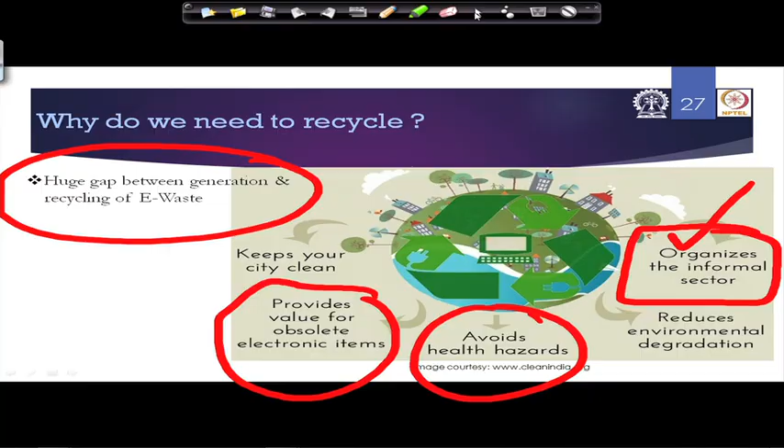In Mumbai, one of the oldest e-waste recyclers in India, EcoReco, is based there. Mr. Jain heads that company, and I had seen him at some waste-related meetings. He advocates that we need to bring in the informal sector, which is very good at collection of e-waste. The informal sector can do the dismantling part, but then it has to come to the formal sector for the rest.

But of course, how will the economics work? The money that can be made is actually from the gold and other precious materials that are recovered. So somebody has to figure out how the economics will work. Maybe the government has to create a small body which can bring all these stakeholders together and mediate between them to come up with a solution so it can work in that area.

So that's management of e-waste, in terms of recycling. What is the typical way this is done in a developing or developed country?

The e-waste comes in and gets sorted. If there's electronic waste which can potentially be repaired and used, or upgraded, you test it out, and if it can be refurbished, those things can go back into the market.

Places like OLX, eBay, and many sites these days let you buy refurbished computers. Even on Amazon and Flipkart, you often see products marked as not brand new but refurbished, and there is a market for that. As long as it's from a trusted supplier, people will buy it. So this is one pathway: repair, upgrade, test, and refurbish.

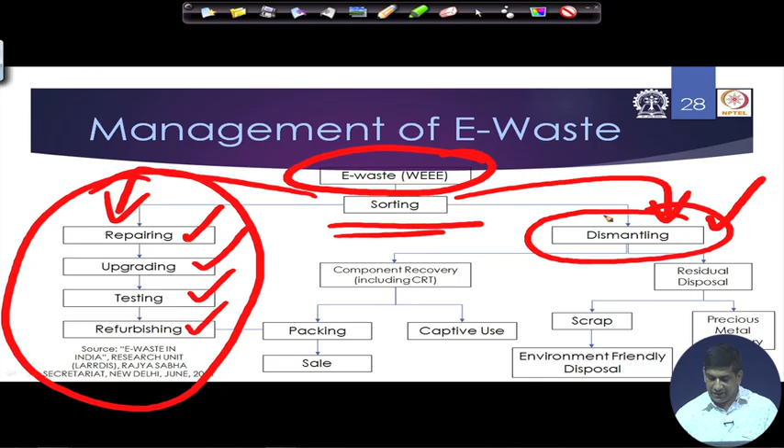The problem arises when we get into residual disposal and precious metal recovery, where heavy aqua regia and other processes are used by the informal sector in a very crude way. The leftover scrap just gets dumped on the side of the road, sometimes in low-lying areas, close to a river, or close to a pond.

There are instances where the pH of a water body near such sites is almost zero, and lead concentration is several hundred times more than what should be in a surface water body. So that becomes problematic.

Then there's the CRT, which used to be a big component. Gradually CRTs are going down; we aren't using that much CRT anymore. Everything is becoming flat panel, and even computer monitors and TVs with CRTs are phasing out.

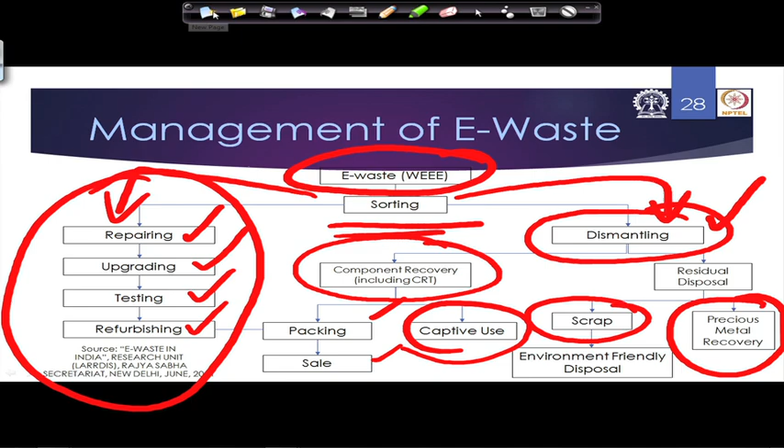But in the disposal stream, you still see some CRTs showing up. If the CRT is in working condition, it can be packed for captive use or sold. If not, the glass can be recycled and lead recovered from it. So in the big picture, this is how e-waste management typically works when we try to keep it out of the landfill, which is the goal here.

Let's look at some of these top e-waste management companies in India. First we have E-Parisaraa, which claims to be India's first e-waste recycler. It's a pretty big company based out of Bangalore, and now they have branches in other places as well. They try to recycle in an eco-friendly way, collecting e-waste and recycling it responsibly.

Then you have EarthSense, another company based out of Andhra Pradesh, or Telangana now. It has services in the area of Delhi, Gurgaon, Mumbai, Kolkata, Hyderabad, Chennai, Bangalore, Kerala, and other places. That's where they are doing their work.

In terms of steps, they collect the garbage, transport it, segregate, dismantle, and recycle. In terms of recycling efficiency, almost 98% of the material can be recovered from e-waste.

If you just look at any electronics, say an old computer at home, take it apart. If you are an engineer, we should be good at that, isn't it? We should try to take things apart and learn what's in there. If you take it apart, what you'll see, if it's an older computer, the casing will most likely be iron.

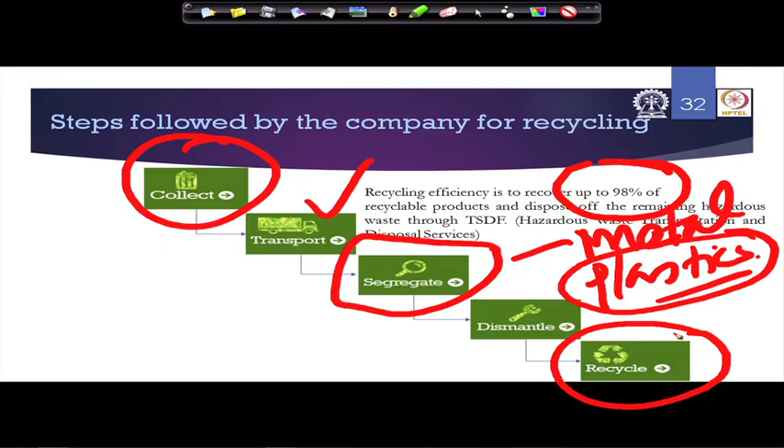Up to this point, the informal sector can still do this work for us. The problem right now is, although we have e-waste management rules, our authorized recycling companies are not working at their full capacity - they are not getting the e-waste coming to them. So if we can take the informal sector, which is doing this job anyway for most of the electronic waste, and connect them with our authorized recycling companies that have good technology, it's a win-win for both.

But somebody has to make it happen, and I think it's only a government organization, some sort of semi-government or quasi-government organization, that has to set this up to facilitate it. That's how they do it in other countries. Like in Ontario, there's an e-waste stewardship program - it's a very small, government-funded organization.

What the government does is get money from all the electronic producers who sell their products in Ontario. As I was telling you in the previous video, you have to pay $35 extra for a laptop that you buy.

35 is just approximately, depending on the type and cost of the laptop, and part of that money goes to the EWaste stewardship program that funds that program.

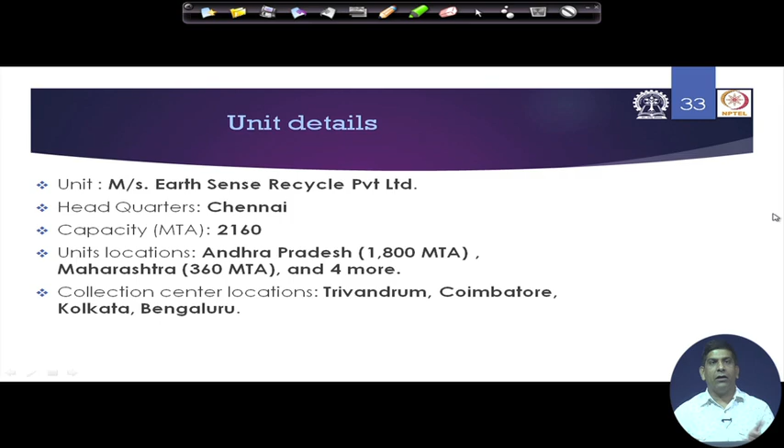So this is some detail of Earthsense Recycle, headquartered in Chennai, with unit locations in Andhra Pradesh and Maharashtra, and they have 4 more units. For collection centers, they have Trivandrum, Coimbatore, Kolkata and Bangalore. That's where they have their facility.

Then Sims Recycling, which is trying to do work in Karnataka, Tamil Nadu, and Uttar Pradesh. Again, that company is out there trying to do some work in this area. Attero is another recycler, based in Delhi and Hyderabad. They are also doing work in this area. Very similar concept—everybody is using a similar concept.

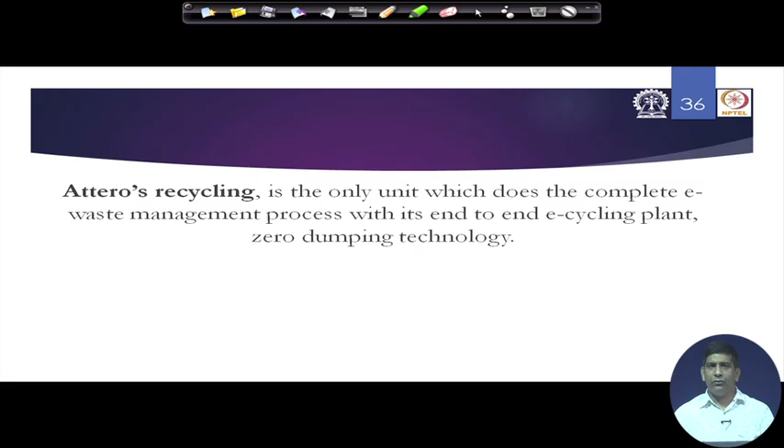Here it's the only unit which does a complete e-waste management process with end-to-end e-cycling plant, zero dumping technology. Many of the other plants only handle basic stuff, not the highly complicated stuff. For example, batteries and heavy metal recovery from batteries actually gets sent all the way to Belgium.

Because the technology is not out there, it's mostly done in Belgium, by a company called Umicore, I think, that does that in Belgium. But that's for what is collected in the formal sector. Whatever is collected in the informal sector just gets somehow recycled. That's actually not real recycling—they just try to recover some heavy metals to make money, and the process damages the environment.

So Attero, the way they work, they will come to your house and collect the e-waste, all electronics, from your doorstep. It's a NASA recognized technology inventor, with a wide range of services and countrywide pickup, and then they take it to a center for processing, where they recycle it and reuse it.

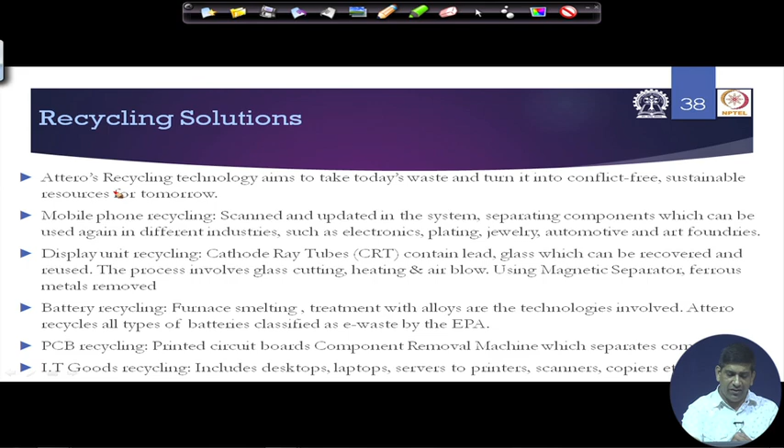Their recycling technology aims to take today's waste and turn it into a conflict-free, sustainable resource for tomorrow. They do mobile phone recycling, display unit recycling, battery recycling, PCB recycling, IT goods recycling, and all those things.

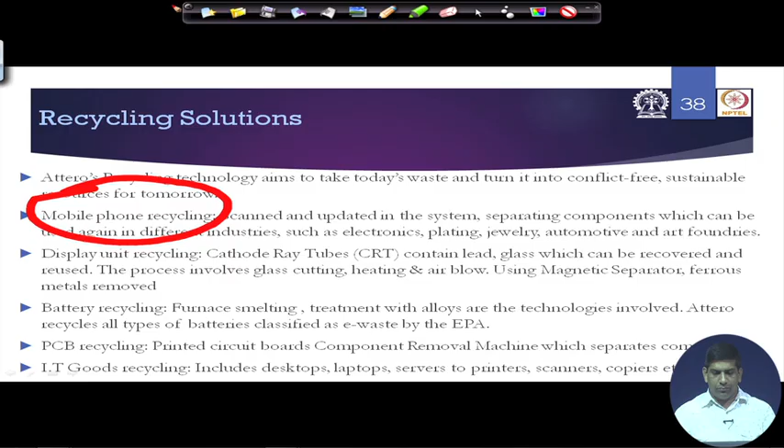So in terms of unit details, Attero recycling capacity is 12,000 metric tons. It's in Uttarakhand. Center locations are Delhi, Hyderabad, and other places.

The next is a commitment from Green Earth, that's this particular company. They are based out in Bangalore. E-Waste Recyclers India, EWRI, does the recycling of e-waste.

So as you can see, there are companies out there. It's not that companies are not out there in India. We Recycle, that's another one, again based out in Delhi. They try to do collection of e-waste.

Green Escape, again based out of Delhi, fulfills social responsibility through sustainable practice. JS Pigments serves mostly West Bengal, Odisha, Assam, Madhya Pradesh. That's their area, and they have an office in Kolkata as well.

Again, the action plan followed: collection of disposed zinc, brass, recovery starts with separation of containing metals. They try to use magnetics, sink-float, hand sorting, pre-treatment, melting, refining. JS Pigment is trying to do this as per environmental sustainability standards.

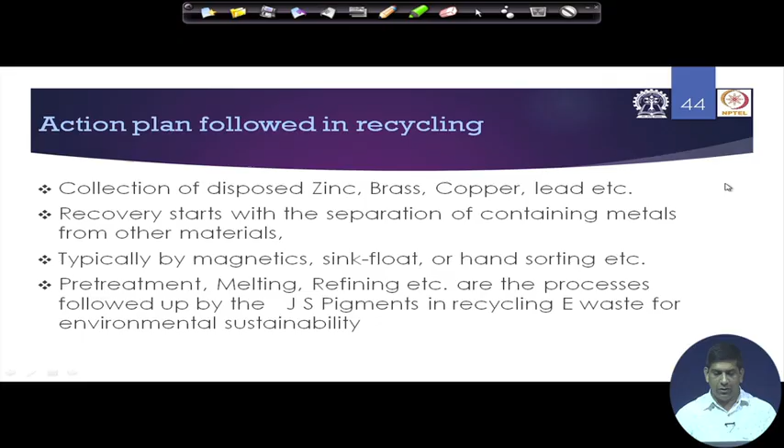This is just to give you some idea about the different companies out there. There are a lot of companies trying to do sustainable e-waste recycling in the country. It's not that things are not there, it's only that there is a gap between these companies not being able to get e-waste coming to them, and it mostly goes to the informal sector right now.

This headquarters is in Kolkata. Then High Tech Recycling India Private Limited, that's another one. They do e-waste recycling: removal of covers, removal of cable assembly, dismantling of rear panel.

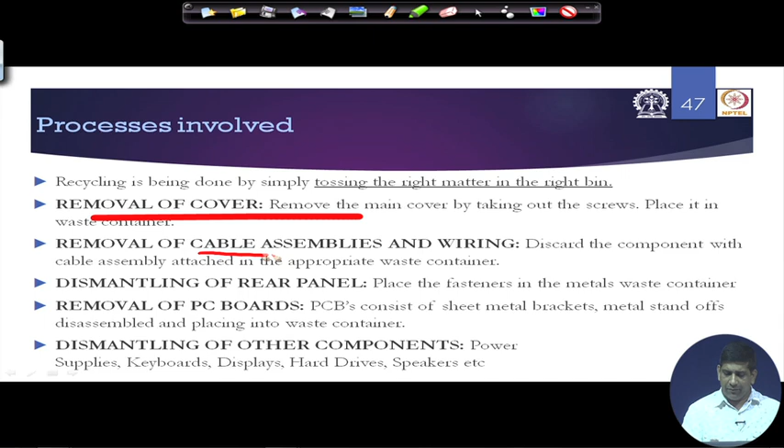So what I was trying to explain earlier: cable assembly and wiring, dismantling of rear panel, removal of PCBs, dismantling of other components. They try to do that and recover different metals, plastics and other things.

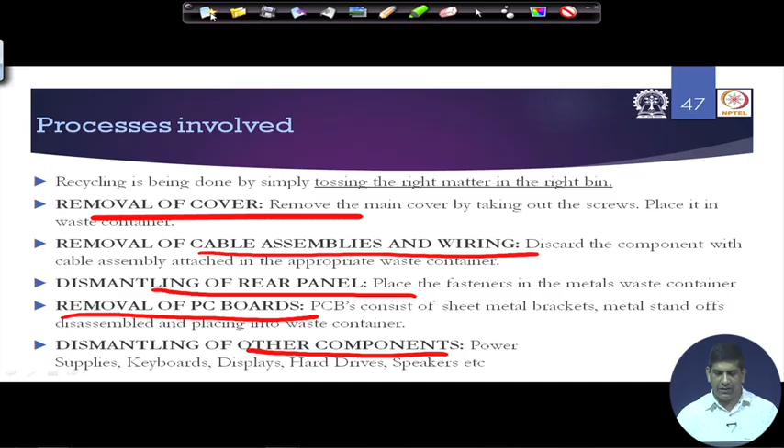They have a plant in Maharashtra, in Pune. If you remember, Maharashtra was the highest producer of e-waste in India. So you see a lot of plants based out in Maharashtra, of course, where the market is.

Then Earth E-Waste Management Private Limited, that's another company. Some of these companies' information I collected a few months back, almost a year back, so I hope all these companies are still working. If they are not, let me know.

I would like you to go search these companies' websites and find out if they are still working, because some of those companies were really struggling to survive as they were not able to get enough e-waste coming to them. So it's Earth E-Waste Management.

They again do sorting, identify usefulness. Every company has the same sort of process: sorting, identify the usefulness. If it's good, if it can be used, it can be refurbished and sold off. Then what are the hazardous components there?

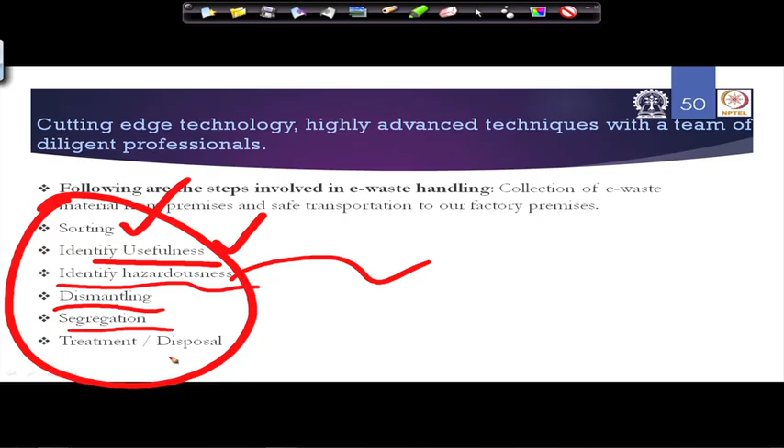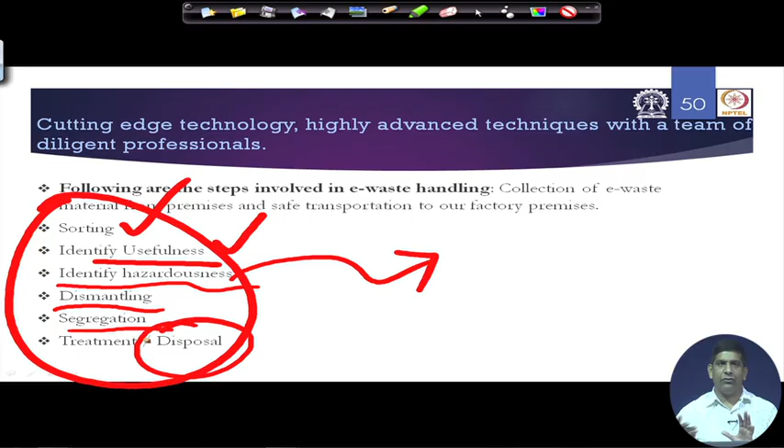You dismantle them, segregate them. Whatever is the hazardous stuff, you treat it. If you can treat it in your plant, if not, you send it to some other plant which can treat it. Whatever cannot be treated, you dispose of it in a safe manner, with safe disposal of electronic components.

That's how they try to do it. This one is based out in Gujarat, collection center in Surat, capacity 6,000 metric tons per annum. Most of the companies are pretty big. So this is how the different companies out there operate.

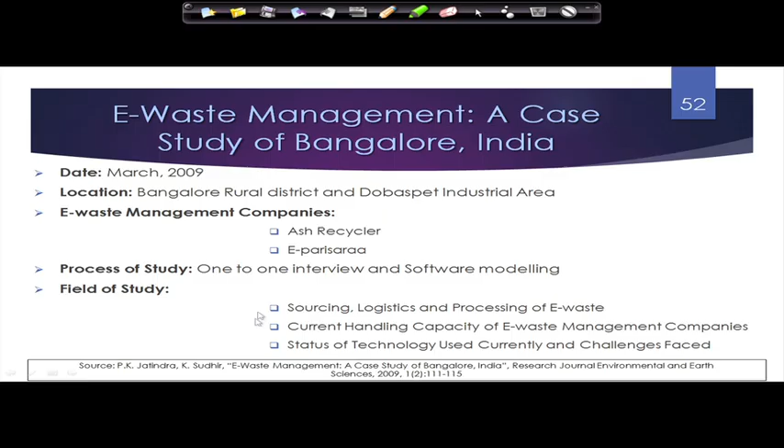We'll just talk about some of the stuff being done in Bangalore, which is the IT capital of India. There was one study done, basically a summary of this particular study, looking at e-waste management companies like E-parisaraa. They looked at one-to-one interviews, some software modeling, and examined sourcing, logistics, processing, current handling, and status of technology.

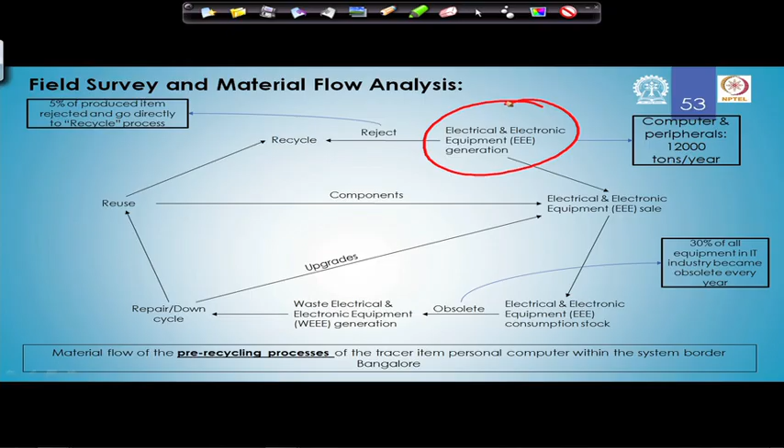That's getting into around 12,000 tons per year, and this number is a few years old, so it must have gone up. Out of these, they may be able to sell some stuff which is still working, and then that goes back to the consumption stock.

If it becomes obsolete, it becomes e-waste generation, then any reject has to get recycled.

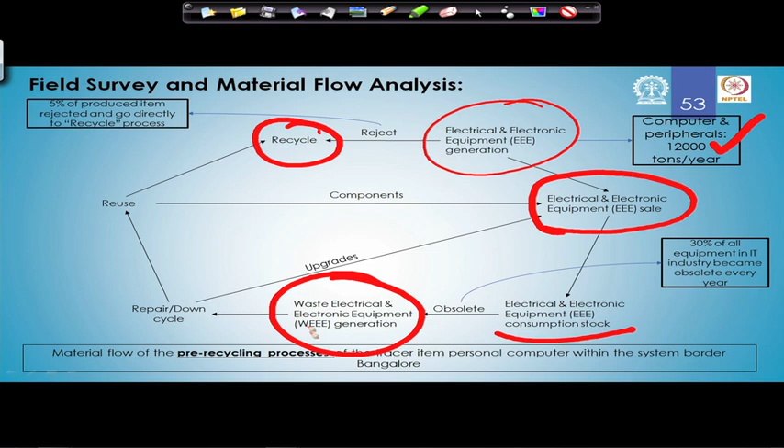When you have e-waste, you repair or downcycle. If you cannot repair, you have certain components - either the whole thing can be reused, or if not, part of the components can be reused, and that goes back over here. When you try to recycle the components, that again goes to the recycling companies.

This is what they have found, that 30% of all equipment in the IT industry becomes obsolete every year. So almost one third of the computers that we buy becomes obsolete every year. It's not that the computer you buy that year becomes obsolete, because it's a computer that was bought maybe a few years back.

These days computers don't have a big lifespan because software keeps changing, processors changing - i5, i7, different cores - and that leads to, because of the improvement, many times we are forced to buy new computers, new laptops. So that's

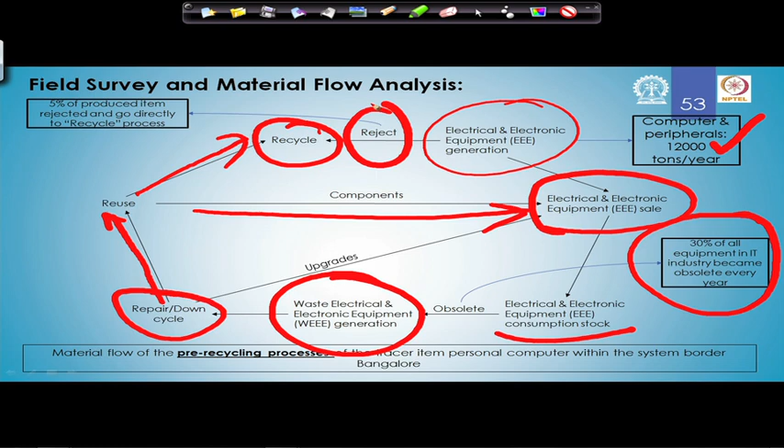goes into the waste stream. One thing is that in terms of the computer and peripherals, items also get rejected because of some bad items. So 5% of the produced item gets rejected and goes directly to the recycling process. That is also there in terms of the whole recycling picture, what they have seen in Bangalore.

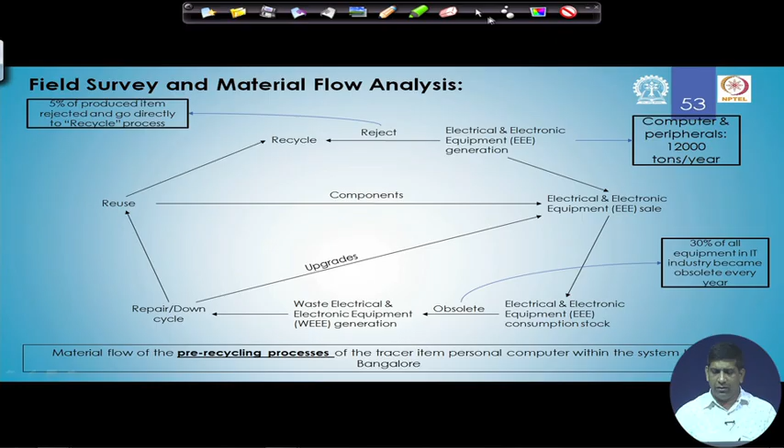Here's how they were trying to do recycling in e-Parisara, the recycling places: personal computer, dismantle, sorting, segregation. There are non-recoverable items, but there are some hazardous components. Those hazardous components need to go to an engineered landfill, a hazardous landfill.

If there is something incinerable, they can be incinerated. Non-hazardous, non-incinerable material can go to a sanitary landfill, which is the municipal solid waste. And recoverable metal, plastics and glass - this is actually a very good chunk. How do you recover that? You do size reduction, you shred it, you do some physicochemical separation, density-driven vibratory screen, triboelectric separation.

So all those different types of things can be done. Then plastic can be pelletized for new product where there could be mechanical recycling, pelletization, organic process, chemical recycling, thermal recycling - those things are there.

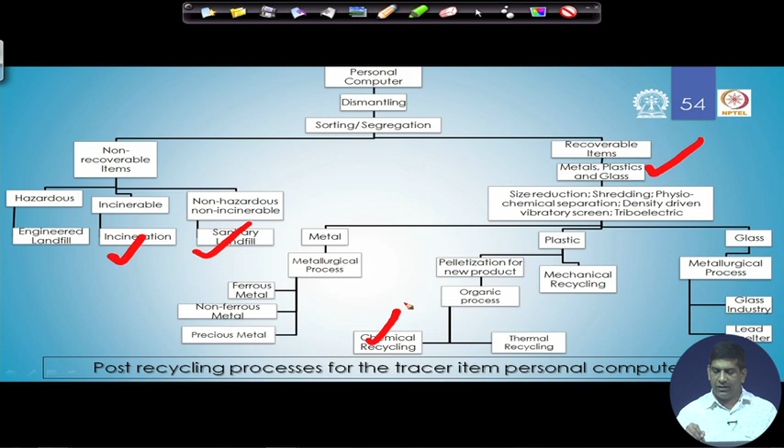For glass, there are metallurgical processes in terms of the glass industry - this glass also has a lot of lead, so lead smelters can be used. For metals, there are metallurgical processes which are used - ferrous metal, non-ferrous metal, precious metal. This is the most critical part actually, where those things are also used. So this is how the post-recycling processes work for different items in personal computers.

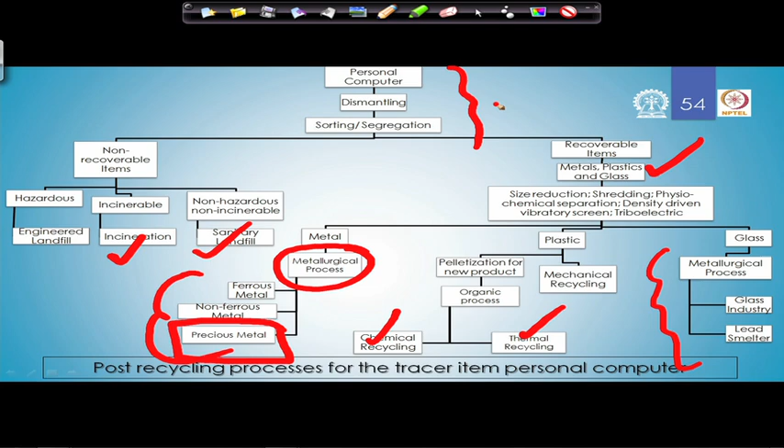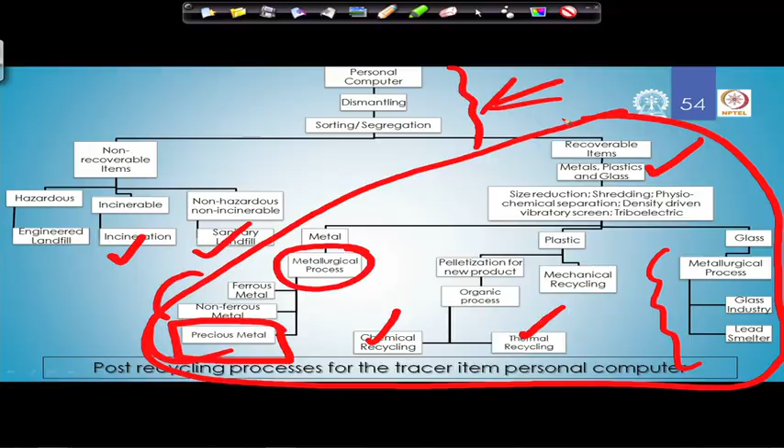Now, if you look at up to the dismantling part, things can be done at the informal sector level, but when it comes to this part, it is better to be done in a formal environment where you have some sort of environmental control - not only for environmental and human health implications of the population, but also for the workers working in these areas. That's one of the issues for the informal sector - those workers.

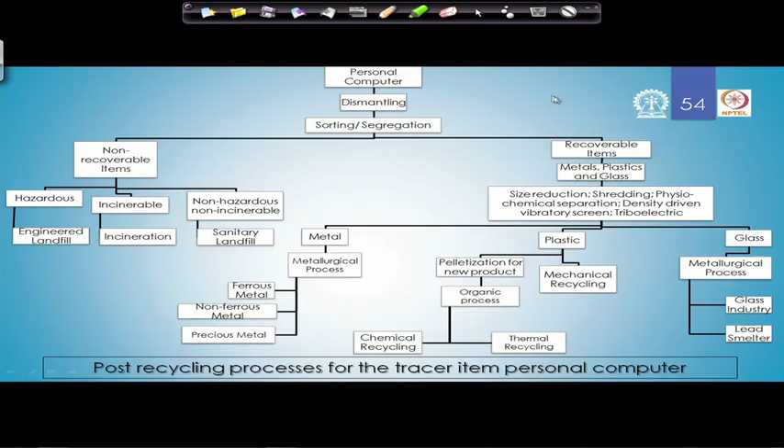Many of those workers actually don't survive past their 30s or maybe early 40s. Just because of all the fumes and other things that they inhale, they get all sorts of disease and they die very young, which is really sad. But that's what happens to those informal sector people who are working with electronic waste and any other hazardous kind of worker, any hazardous waste.

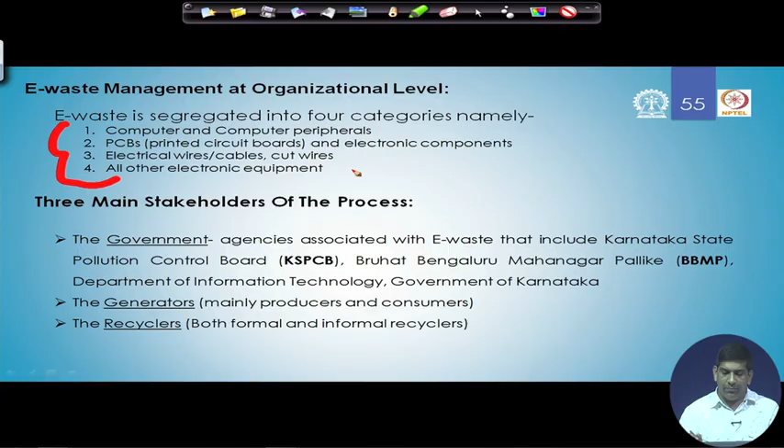So e-waste is separated into 4 major categories: computer and computer peripherals, PCBs which is the printed circuit boards and electronic components, electrical wires, and all other electronic equipment. The main stakeholders are, of course, the government - Karnataka State Pollution Control Board, Bruhat Bengaluru Mahanagar Pallike, Department of Information Technology - the generators which is mainly producers and consumers, and recyclers, both formal and informal recyclers. So these are the 3 major stakeholders of the process which needs to get involved.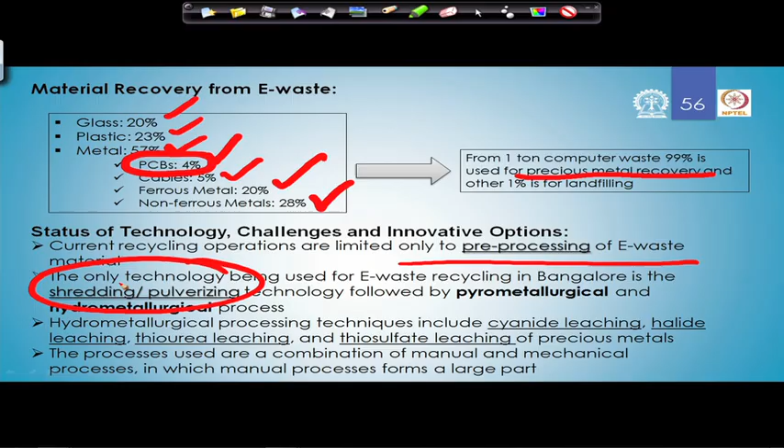The current recycling operation is only limited to pre-processing. The only technology being used to recycle in Bangalore is shredding and pulverizing. They shred and pulverize, and then do some pyrometallurgical and hydrometallurgical processes.

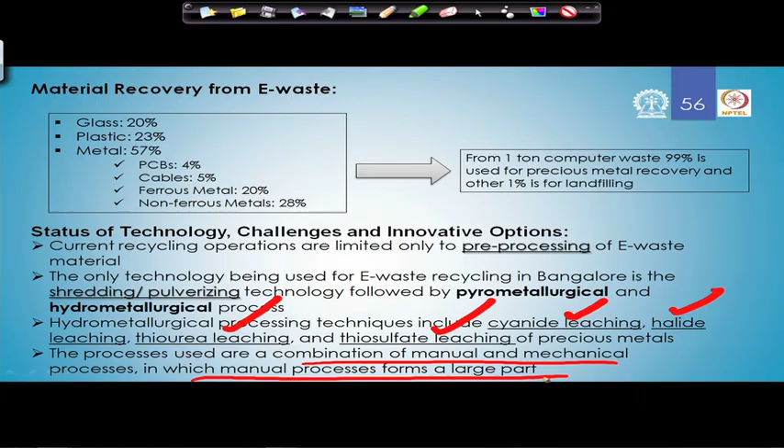For the hydrometallurgical process, they do cyanide leaching, halide leaching, thiourea and thiosulfate leaching of precious metal. It's a process using a combination of manual and mechanical methods, where manual process forms a large part. There's a lot of manual process involved in these facilities.

New rules have also come up, modified a little to be easier to understand and follow, and we will talk about that maybe in the video after this, or the week after, or maybe a video or two from now. But there is a Digital India initiative.

Let's stop here, and we'll continue our discussion in the next module, where I will show you some of the list of different recyclers, and then go into more detail in terms of rules and other stuff.